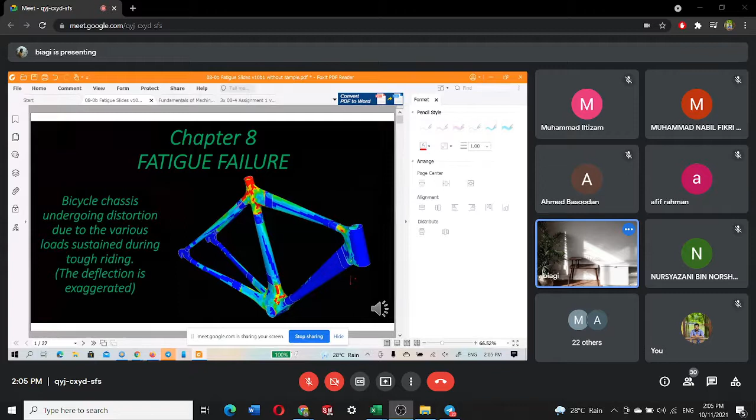A single force, it means that, wait, maybe I should open this one. Can you all see me or not? Can you all see me? Yes, can, Betul.

Okay, so we're talking about this cable. This cable is actually quite thick, about 2 millimeters. If it's steel wire, and I ask you to break it just like this, using a single force, a static force, if you apply it like this, it will be static force. Regardless of how strong you are, you will not succeed in breaking that wire or cable, whatever you want to call it. It is so strong that there is no way a human being can break it. It is non-logical.

Unless of course you are somebody very, very strong, not a normal human being. If you're a normal human being like me, there's no way you can use static force to break a 2 millimeter steel wire. You cannot either pull it or twist it, whatever, you cannot break it. Why? Because the steel is so strong. Let me remind you that steel is about 7 times stronger than bone, and your bone is many, many times stronger than your flesh. So what are the chances of you breaking the steel wire?

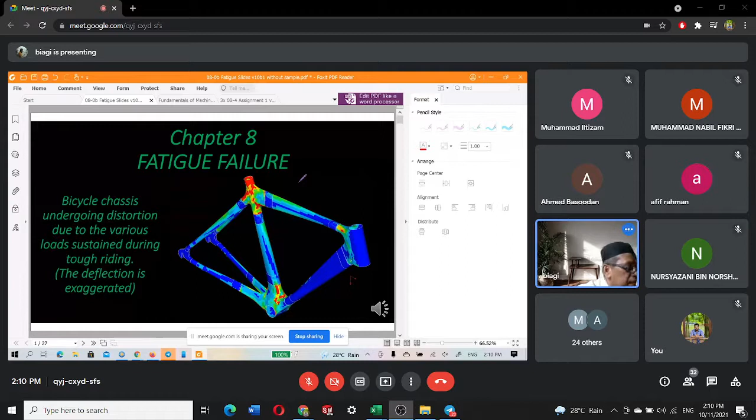Okay, so let's go back to this lecture. Bicycle chassis, of course, has been designed to be so strong it will not fail due to fatigue failure, to fatigue stress, because why? We do the calculation. Who does the calculation? Engineers like you all. You do the calculation and make sure it won't fail. That is why you are learning this.

There's some more. There are a lot of fatigue stresses in this shaft, on this shaft, in this shaft. Of course, there's also a lot here. Why? Because the force is repeating. So because of that, there are a lot of stresses here, fatigue stresses.

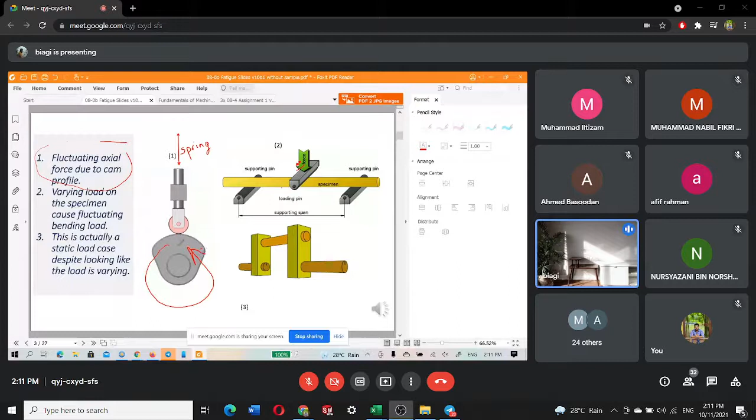Take a look at this one. What you see here is a fluctuating axial force due to cam profile. I think you're familiar with this. When this thing rotates, it will push up and down, and because there's a spring, it will go down and then move up again. What happened here is that there will be a repeating axial stress acting on this shaft.

Now what about this one? This one is also the same like the first one, but the stress is due to bending, which is more dangerous, I'd say. When stress is reversing, it is evil in design. So this is bending - it will bend like this, become straight again, then bend again and straight again. This force creates bending stress, and the bending stress is repeating. Similar for this one, there will also be bending stress.

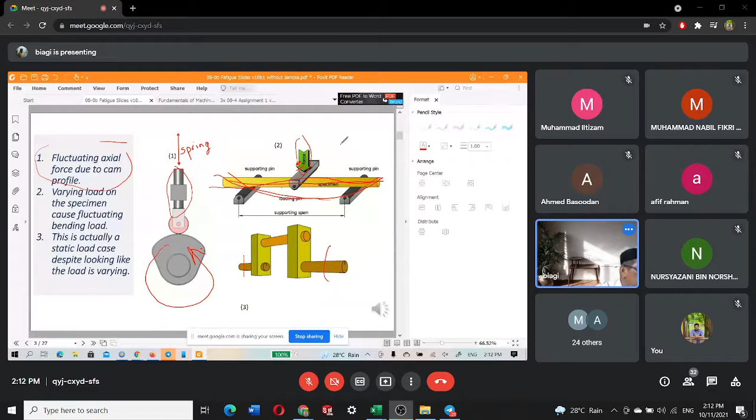So when it is repeating, then you are talking about fatigue, and when there is fatigue, you have to be very careful. This is a failure due to fatigue. Most people design and calculate everything nicely, but sometimes there are still unknown forces that can create fatigue stress and cause this to fail. Similarly, this is the result of fatigue stress.

So let's go to our topic today: chapter objective is to analyze fatigue load and stresses acting on critical structure, and to evaluate the safety of the structure using various fatigue failure criterions. The outline will be fundamentals and fatigue strength, then fatigue load and stresses, stress concentration, and then fatigue failure.

Now the first one will be fatigue fundamental and fatigue strength. We are going to look at how to determine the strength of the steel with regard to fatigue - in other words, fatigue strength. You know that we have SUT, the ultimate tensile strength, and SY, yield strength. These are all static, for static stress and static load that you have studied in the previous topic. But right now you are doing fatigue stress, so you must find the fatigue strength.

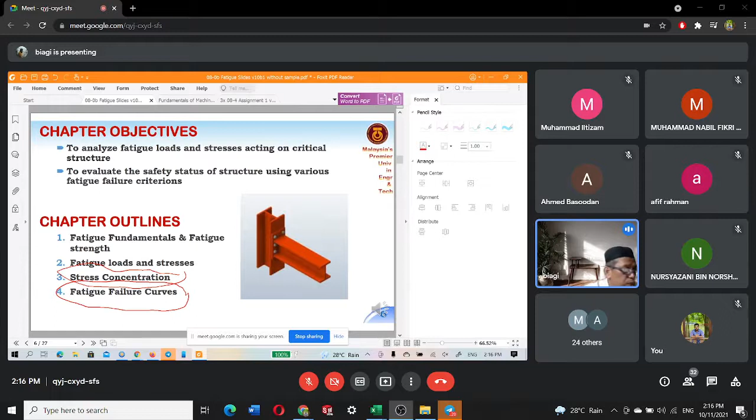So let's go to the next topic - how did this one start? So many scientists have tried to study fatigue failure, and many did good work, but the one that is most popular and most referred to would be this man, R.R. Moore. He created this experiment to determine the fatigue strength of material.

Let me introduce to you this machine. Now what you have here - this is a bearing. And then you have a motor here.

And then here you have a counter. You know what is a counter? It counts the number of revolutions.

And then you have this one, this is the load, he will apply load F. Why? Because this is the specimen. So what happens is that he is going to conduct an experiment creating bending stress here. There will be bending stress here, and because of that bending stress, this specimen structure will fail, will break.

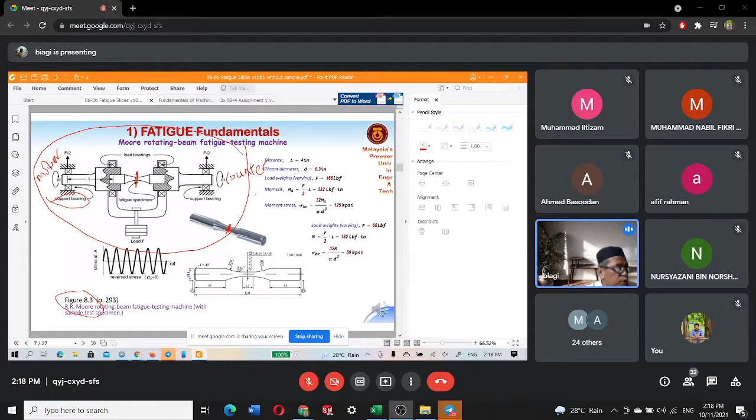Of course he creates thousands of this one, not one, thousands of this one. And the rule is that according to his experiment, all these specimens are totally identical. Everything, the smoothness, it is very smooth.

And the shape, everything are all exactly the same. So what he did is that he will place it inside here like this, you see, it placed inside here like this. And then he will apply the load F.

Now the question is, of course, some of you may ask, why don't just put this thing here? Why you need this thing? So complicated, right? Why just don't put this part here up to here? Anyone can guess what is the answer? Why does he have to create such a very complicated structure, this one?

To determine the bending stress. Remember I mentioned that when there is a bending stress, there is also another stress. What is it? Transverse shear stress. So if he were to put this one just like this, then other than bending stress, there will also be transverse shear stress. So what he will get will be a value that has to be calculated more complicated. So by doing this structure, the bending stress will be pure bending stress. There is no transverse shear stress, and so the experiment is very, very accurate.

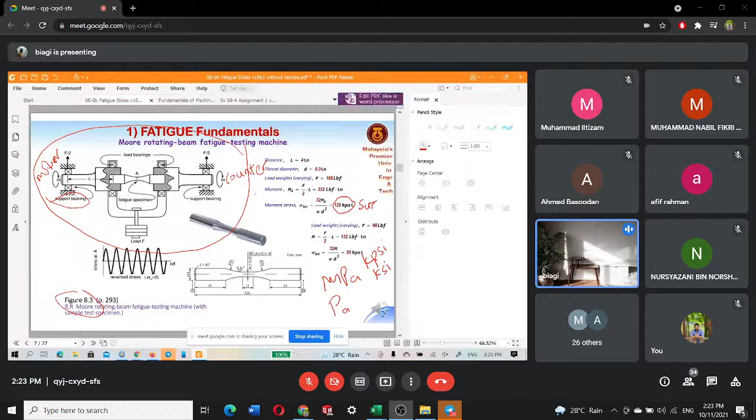So for that to happen, the force here has to be 166. Force is 166. So by applying a force, pound force of 166, then we have this one. So when we apply the first one, 166.

So after placing the load 166, the motor was started. They switch on the motor, the motor starts to rotate. When the motor rotates, the shaft also rotates. This shaft also rotates. And the counter calculates the number of cycles, one cycle, two cycles. So when F is 166, before the first cycle is completed, this one breaks.

Okay, so here we write 166, zero cycle.

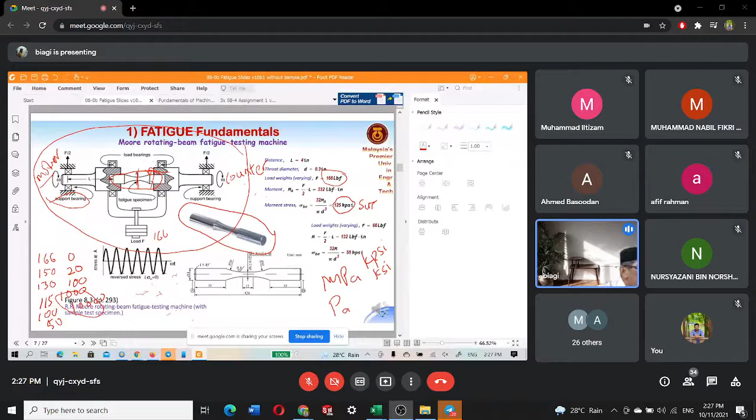So he tries lower, also the same. Try 40, also the same. Lasts forever. It does not break.

So with this data, what Moore did was create a graph. He created this graph based on the data from the experiment that he got, and as you can see, it creates...

a special line. You see this one, and then you see this, and one more here, and here you see this one. So this is the one from SUT.

When the load is reduced some more, it lasts even more. When F is reduced some more, you get this one. And then eventually at 50, remember at F equal to 50, it comes to this one.

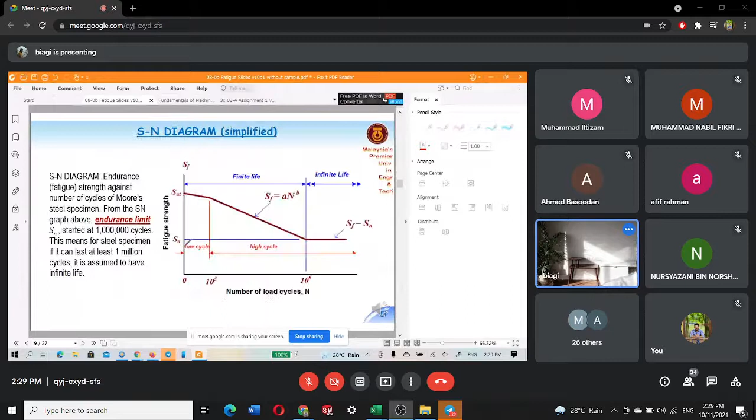Because different books, I forgot, different books use different terms. Wait, this is the endurance limit. So this one, 50, is the endurance limit.

It is the, okay, this is the, wait, this is the right, endurance limit. So this 50 is the endurance limit of this steel.

So what is the endurance limit? Endurance limit means that if you were to apply a stress lower than the endurance limit of the material, then that material will never fail. It will continue and continue and continue forever. And this is a very significant finding.

Why? Because if you look at here, if you look at this one, at 10 power 6 cycle, right? Now, if you say for 10 power 6, so if you apply a load at here, will it fail? Can it fail? Yes, it can fail. But anything from here to here, okay, let me clear that one first.

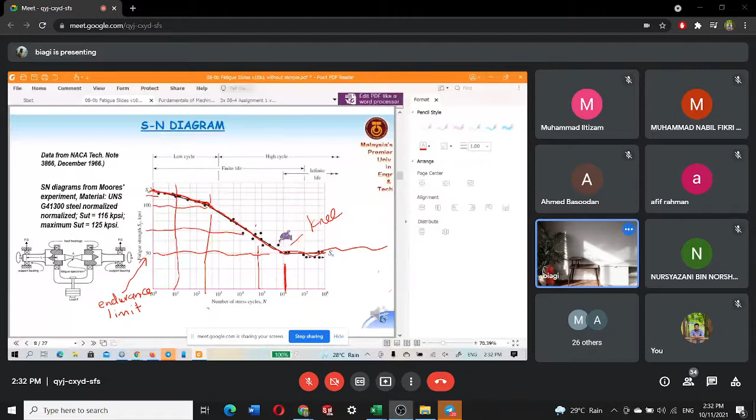Can I use this one? Good, I'm using Foxit. Okay, so everything from here to here can fail. So if you apply the load from here to here, the structure can fail.

So if you want the structure to not fail, then you must apply the load that is 50 or lower. Now, if you look from this one, you will notice that this one is 1 million cycle.

So the steel, after 1 million cycle, if you use anything higher than 50, let's say use 51 kpsi, then it will not be 1 million cycle. It will be maybe 999,999. Still will fail.

Okay, so before I proceed further into this, I hope you're okay. Let me explain to you now. This one here is called low cycle, that is from 0 to 10 power 3.

So from 1, from 1... what is this?

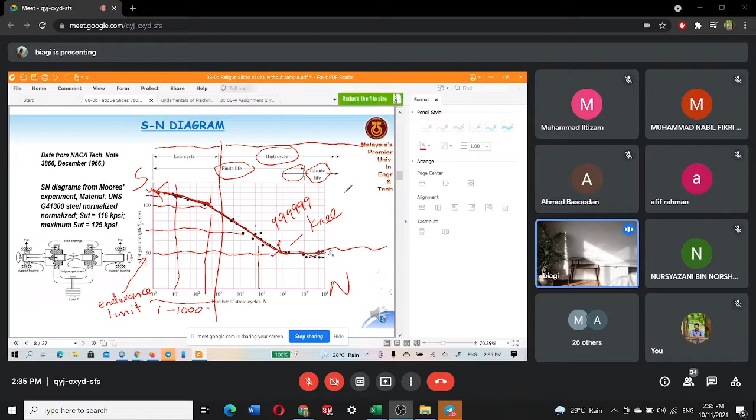However, you can see here there is an ambiguity, and this ambiguity is by the research. So for the sake of education, we have simplified this diagram to become like this. This will be the diagram that you will be using.

This is the endurance limit cycle, endurance fatigue strength against number of cycles for steel specimen - the SN diagram, endurance limit, SN, is endurance limit. It starts at 1 million cycle.

This means that for a steel specimen, if it can last 1 million cycle, we know it can last forever. So if you're doing your experiment and discover it can last 1 million cycle, you do not have to test for 2 million, 3 million, 4 million, or 5 million. No need to test anymore. Once it reaches 1 million, it means it will last forever.

Of course, there are external factors that can still make it fail - corrosion and other things. Assuming there's no corrosion, everything is fine. Once you've discovered the specimen can last 1 million cycle, it means it will last 2 million cycle, 10 million cycle, even a googol cycle. A googol cycle, you know, right? A googol cycle is a value with 100 zeros - like 1000 has 3 zeros, googol has 100 zeros.

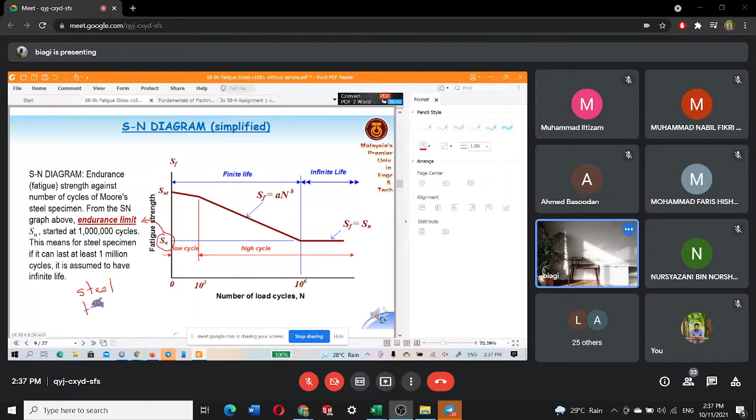The fatigue strength, or we call it the endurance limit, only exists for steel and titanium. Aluminium does not have an endurance limit. What happens when you use aluminium? It will continue to go down.

So those of you who want to create something that lasts forever cannot use aluminium. That's why in the Grand Prix, they use aluminium - because after the race, they throw away the old engine and replace it with a new one. Can your car afford to do that? Today you drive your car, then after you go home, change the engine? That would be a miracle for you all.

So for aluminium, it will continue to go down. The only materials that have an endurance limit are steel and titanium. Take note, remember, this is very important. So far, any questions?

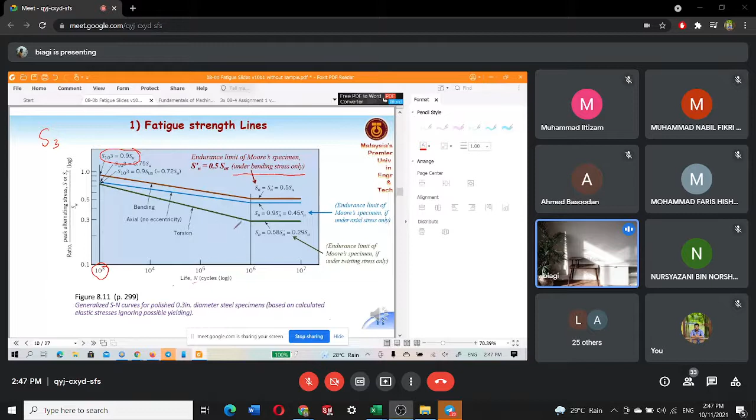This is the equation that you are going to use to determine the strength of the material. Here you have Sn is equal to S dash N times Cl, Cg, Cs, Ct, Cr.

So like I said just now, your specimen is not the same as the one by Moore. Your temperature is not the same as the temperature of that Moore specimen.

For example, maybe you're creating a shaft for your motorcycle, for your crankshaft. You know that your crankshaft will be very warm, in fact very hot, the temperature will probably reach around 80 to 90 degrees. Because of that, the fatigue strength will be lower, so that one will fall under Ct, the temperature constant. We call it the fatigue strength factor for temperature, Ct. So if the temperature is warmer, then you have to find Ct. It's just a matter of reference.

Take a look at here, you have Cl, the load factor. So first you have bending, you have axial, you have torsion. According to your experiment, is the load bending, axial, or torsion?

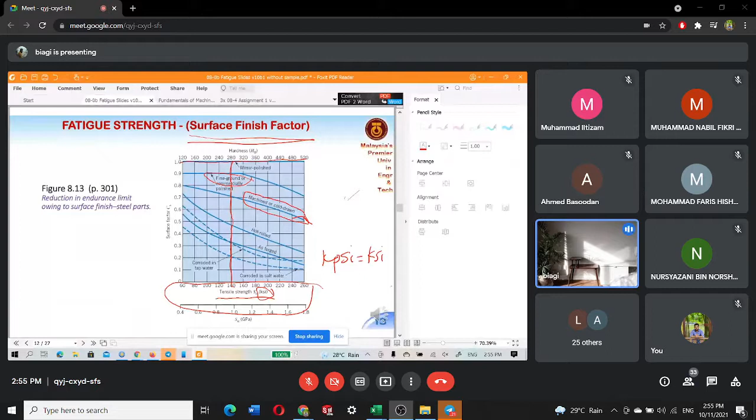Only special people, so if project, then you will use this one, fine ground. This one is only for special project. For most of the time in your experiment, it will be machined or cold drawn. What about hot roll? Now hot roll means that, this is what I say.

When you buy this shaft, you find the shaft material. Remember I mentioned you can buy the shaft, it can be a nail, or what I can't remember. A nail, that's right. So basically, all these are hot roll.

They are hot roll. Why? Because they are melted and then rolled out of the fabrication machine. Hot roll means it is produced by hot rolling. So of course hot roll has anneal and the other two I can't remember. The thing becomes hot, and when it's hot and soft, they pull it out, or they squeeze it out of the hole.

Now cold drawn means it is quite cold, so it was forced through, a lot of pressure is required, and because it's quite cold, the expansion or compression is very small. Because the compression is small, that's why the surface is quite smooth, comparable to machined surface.

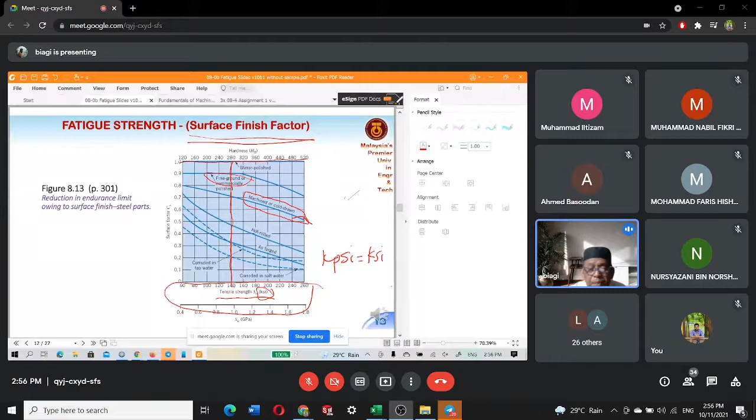Whereas for hot roll, because it's hot, by the time it cools down the surface becomes quite rough. Then worse than hot roll will be forging or casting. You have this one, forging or casting - it is cast or forged, then you take that one.

And corroded in tap water, that one is beyond our scope. So this is diagram 8.13 that you must be familiar with, this is to get the surface factor CS.

Now CT: if the temperature is less than 840 degrees Fahrenheit - how many is that? 840 degrees Fahrenheit is equivalent to 448, okay, Celsius. It's 448 or 450. 450 Celsius. So anything less than 450 centigrade, then bending will be 1.0, axial 1.0, torsion 1.0.

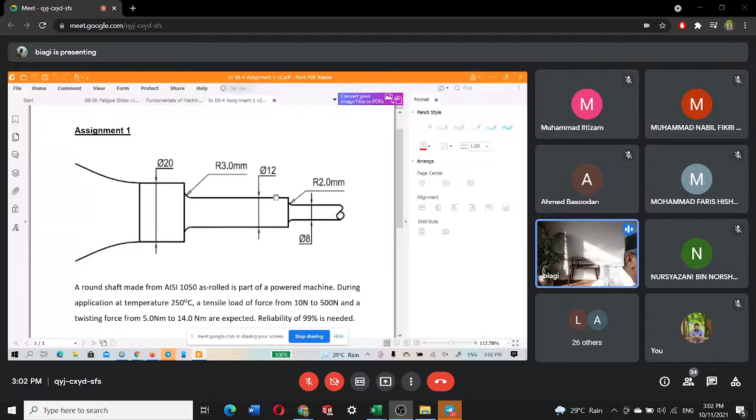Okay, I want to give you 15 minutes to find out what will be the Sn, the endurance limit of this. Now what is this? This is a round shaft made of AISI 1050 as-rolled steel, part of a powered machine. During application at temperature 250 degrees centigrade, a tensile load of force from 10 Newton to 500 Newton...

...and a twisting force of 5 Newton meter to 14 are expected. Reliability of 99% is needed. So what happened, this is a powered machine, to twist and press a screw, not a nail. You use it to twist the screw, and when you twist the screw you must also force it axially, you press it inside. So that's why there are two forces here. This is basically a screwdriver, something like a screwdriver.

So a tensile load force of 10 to 500 Newton, the load is varying from 10 to 500 Newton, but that value is not important to you. What you need to know is that it is a tensile load, and tensile load is axial. So one of the loads here is axial. The second one is a twisting force, that's a torque here, 5 to 14 Newton meter. So there are two forces here: you have the tensile or axial stress, and you have also the twisting stress, that is the torque.

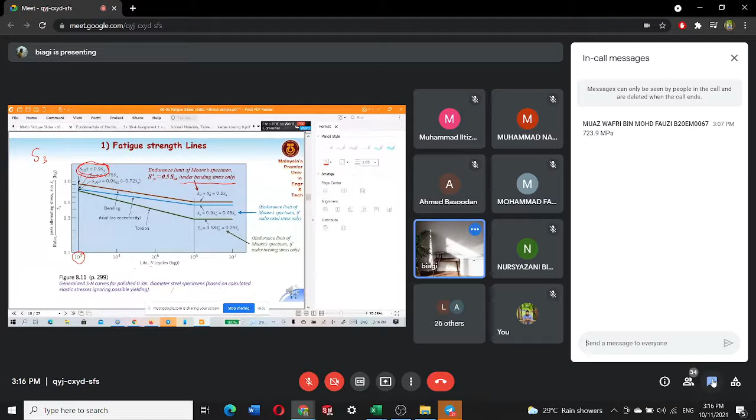And then what about S3? S3 is equal to... wait. S3 is equal to 0.9 SUT, this one, which is for bending. Why do we use the one for bending? Because it is a complex load, there are complex stresses, there are two stresses, so that's why we use the brown line. So S3 equal to 0.9 SUT. Any problem? Anyone has any questions?

So S3 equal to 0.9 SUT, so it will be equal to 652 roughly, MPa. All right.

Okay, so what is this? This is Moore specimen.

So what you need to do is find your specimen. Sn is equal to Sn dash times... look into this one. You have here Sn, CL, CG, CS, CT, CR. You remember? CL, CG, CL, CG, CS, CT, CR.

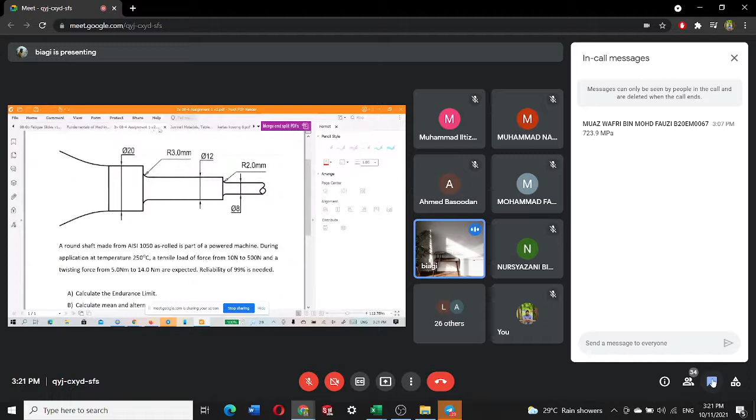Okay, CG, what's the value of CG? Do we take 0.8 or we take 1.0? If you look at the question again, the part that is most critical with this one...

Comment: the part that is critical will be this one, or here. Based on our judgment, we know that this one is going to break first. This one is stronger, this one is larger, right? This part is larger, it's stronger, so it will break here first. So we are using diameter 8.

So if we were to look at the fatigue slide here, we have to use 1.0. Remember, cannot use this one, because why? This is a complex case, cannot use this one because it's a complex case. And because it is 8 millimeter, so we use the one at the top, we cannot use this one. So that is 1.0. So that's the value of CL.

So this is 1.0 times... okay, CL CGCS. Okay, no? CL CGCS, okay CGS, correct. And then surface factor, look at 8.13.

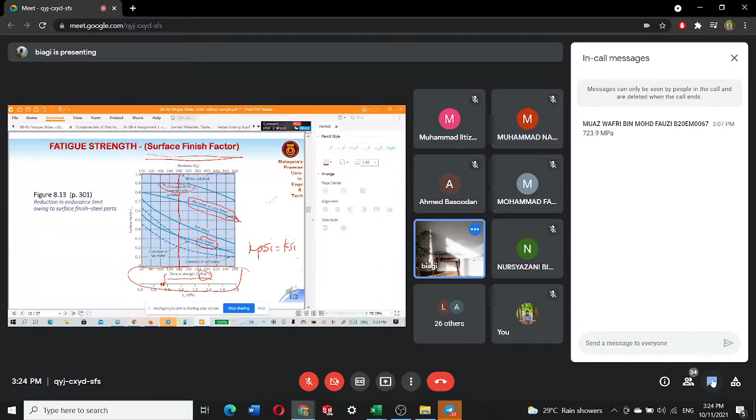0.7, okay, so 0.724 here will be here. Correct? 0.24. So if we were to go up, from here I were to go up, okay, machine, so you will have this one. Does it move just now? Okay, it moves.

Okay, 0.724, so it should be, because this is a machine, so it will be here. So 0.7, 0.75 around there, 0.75, 0.74. Okay, so this one is... why is it so difficult? Answer 0.

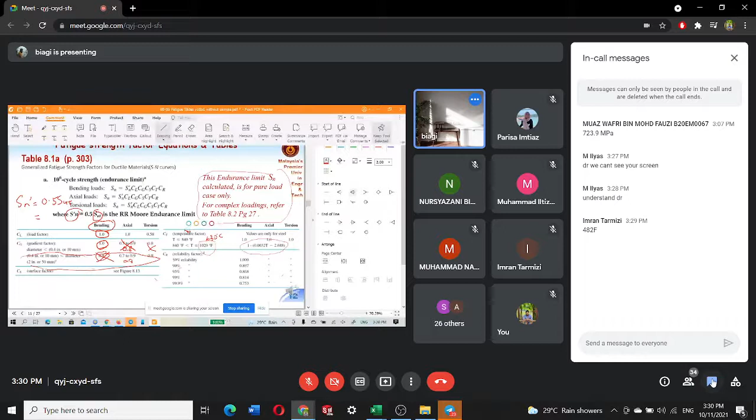448, so less than 448. So you agree, right? CT is equal to 1 because this is 448 degrees centigrade. Okay, so since temperature is 250 degrees, we can calculate that this one is 1, 1, 0.74, CT times 1, and then times CR. CR is equal to... 99, what's the what? 99 degrees reliability, yeah? 99 degrees reliability. So here you have 99% reliability is 0.814.

So you get 0.814. What is this? Yes, okay. 0. What is going on?

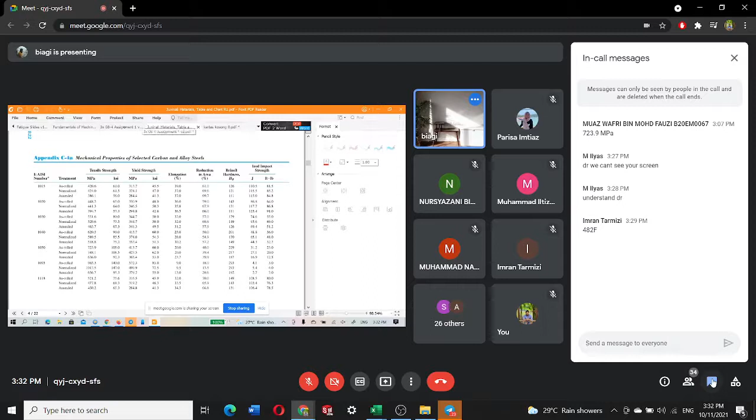What is this? Hold on, I don't understand what is going on. Let me try eraser first. Okay, let's try comment, cancel. Okay, yeah. But battery habis. I do not know what's going on. Okay, I do not know why that one doesn't want to write. Oh no.

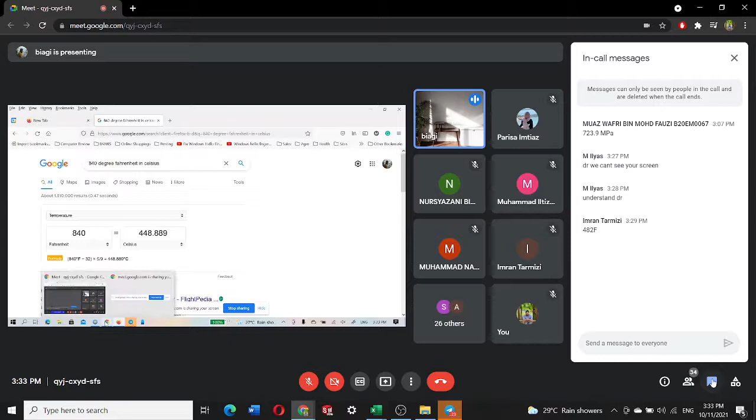Zero point. Is there something I don't know? Don't tell me my computer hang or no. Hold on. Oh, the software hang. Okay, the software hang. Okay man, okay okay, so I will use this one. Yes.

Okay, it's back, 0.74 time, time, 0.814, correct. 0.814. So I calculated this one to be around 224 megapascal. Okay, so what is this?

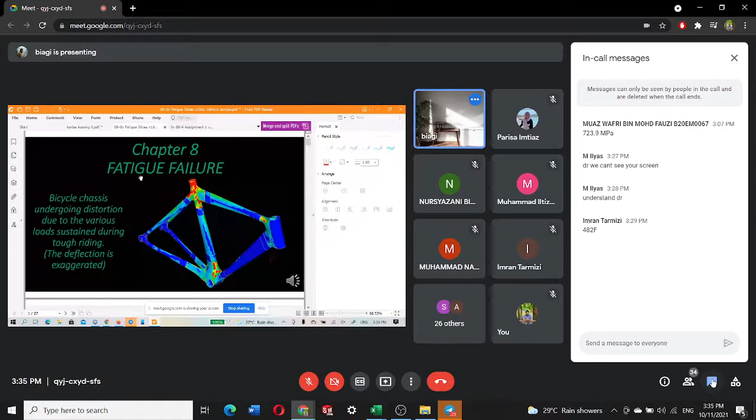So what we have here is the SN diagram. Once you have this, you have discovered or determined the fatigue strength of the machine. So later what you can do is draw the SN diagram, based on what you studied before. So it will be, take this one. Based on the brown line, SN here will be equal to this one.

So S3 will be 0.9 SU, right? S3 0.9 is 652. So this S3 here will be 652. And then your 1000 here will be this one. This is 1000, this is 10 to the power 6. Okay, so this is your SN, 224.

And so this is the line that you are required to draw. This will be your SN diagram that you are going to use later after you've done the stress calculation. Okay, any questions? So it's not so difficult.

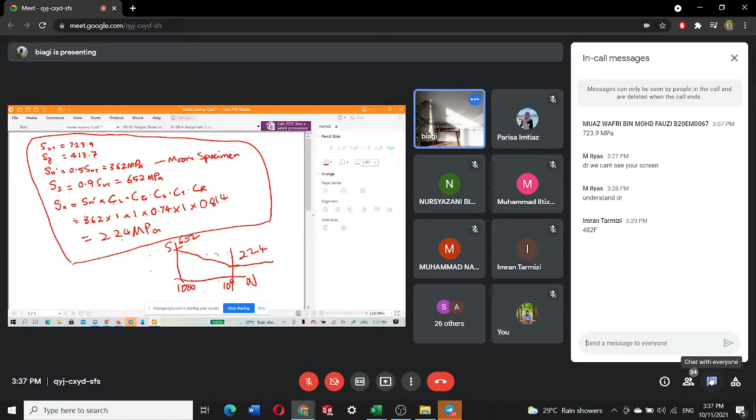Okay, any question? So basically you get 1/4 of the marks already. Remember, if you get this one wrong, everything's gone. Okay. This one is not difficult. Most students should have no problem getting this one right.

Okay, so I assume that you have no problem with this one. So can we proceed with our lecture some more? Any problem so far? Okay. You all are quiet, make me nervous. Are you still there?

Okay, so if you have no problem, we'll go back to our slide here. So this is the first part. Okay, first part, finding SN. Finding SN is the first part. What is SN? The endurance limit. Basically, we're saying that it's the fatigue strength of that material.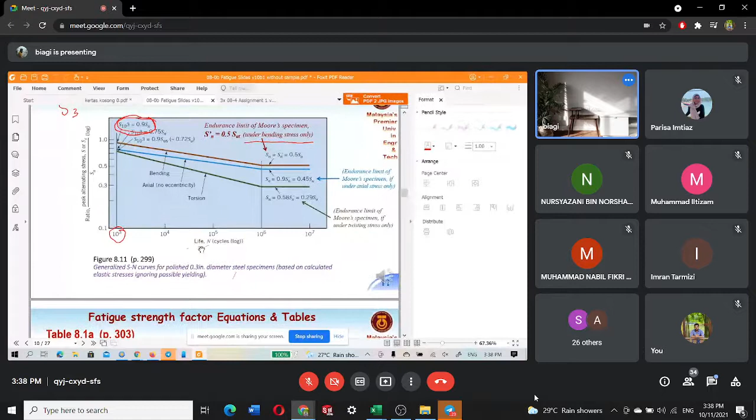Okay, after you have done that, you have calculated everything. So now you have to start on fatigue stresses. Now, fatigue stresses is like this. When the load is repeating, like this, that's repeated stress.

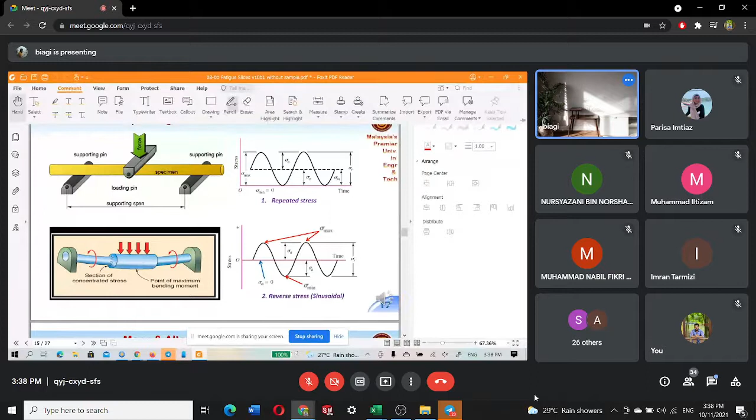Okay, repeated stress, then it becomes fatigue stress. Now, repeated stress in this case, the term repeated stress in this subject means that the load, you can see this one, here is 0, okay, here is 0 stress, okay, here is 0 stress.

So you have here pressure, when this one is put down, so this one will bend, so there will be a stress here, the stress will go up to here, and then it will be released, it will be straight, and then the stress will go here, and what here? No stress, 0 stress, and then it will continue again, and then it will go up again here, full stress, and then it will be 0 again.

This is called repeated stress. So it is apply, let go, apply, let go, apply, let go. This is repeated stress. Okay, now there is another one, repeated stress, but in this subject the term used is reverse stress. What is reverse stress?

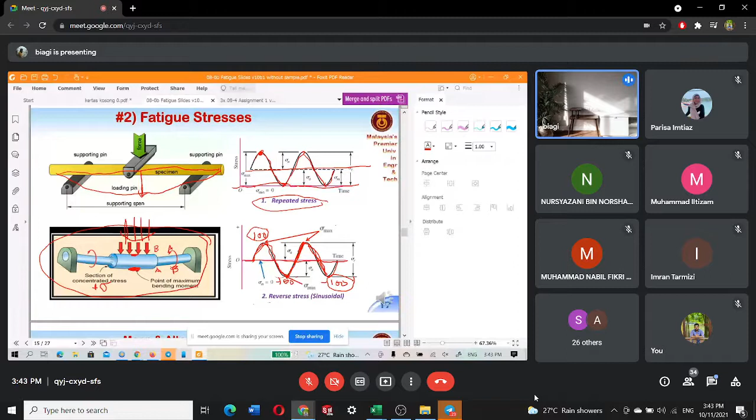So when the value here is 100, and the value here is also 100, the value must be the same, then it is called reverse stress. Most machines actually suffer this kind of stress, like pistons - they support this kind of loading. Most specimens have loading like this, reverse stress, though this is very seldom. So you look at the machine, this is the one that is most used - the stress will be 100 maximum, then negative maximum, then positive maximum, negative.

So we come to the end. The mean stress here will be 0. Now the value between the mean stress and sigma max, this value will be sigma A. What is sigma A? Sigma A is called alternating stress. The line at the middle is called mean stress.

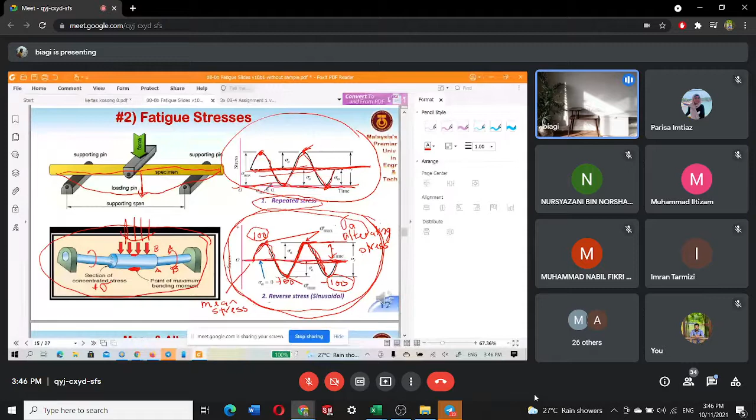Mean stress is always in between sigma max, which is this one, and sigma min here, somewhere here and here. So sigma min is this one. Based on this, you can calculate what will be the sigma min.

So finding the stress is about finding sigma m, which is mean stress, and finding alternating stress. This is mean stress, this one. As long as you find sigma m and sigma a, you have covered 2/3 of your work. But mind you, finding sigma m and sigma a is the most difficult for the student - many make mistakes here.

So now when you do your calculation, for fatigue to occur there must be increasing load and decreasing load, or you can say repeated load. There must be a repeated load. So here there will be a repeated load. This one is sigma max, this one is sigma min.

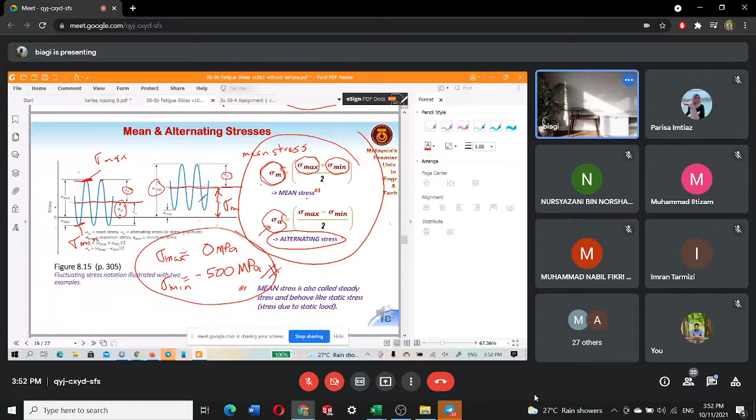Now, just now is to calculate sigma m and sigma a, sigma mean and sigma alternating. Now you are going to calculate stress concentration. For basic types of notches in stress concentration, there will be 3 of them. Actually in engineering there are a lot more, but for our subject here there is 3.

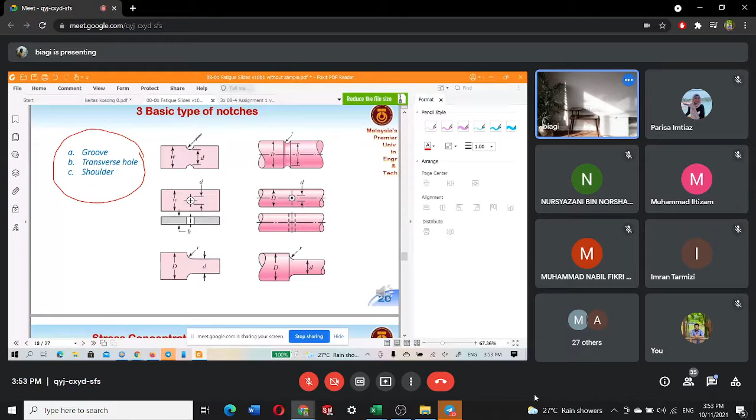Groove, this is groove. Transverse hole, this is transverse hole. And shoulder, this is shoulder, this shoulder, this is shoulder, and this is shoulder.

So when you need to determine your stress concentration, you must decide which one, whether it's groove, transverse hole, or shoulder. It's not so difficult, you have no problem deciding this one. After you have decided, you have to find the KF.

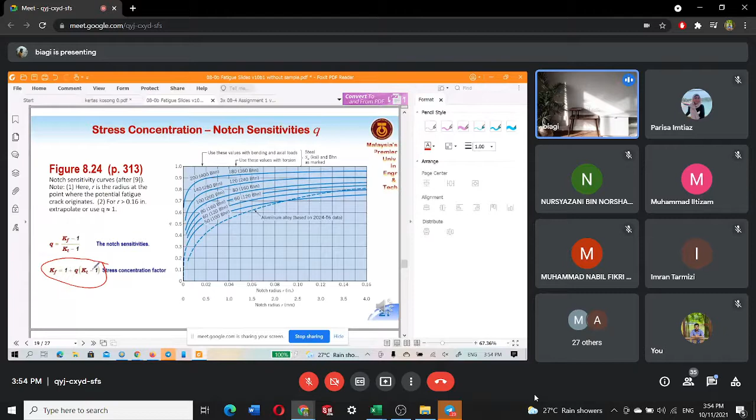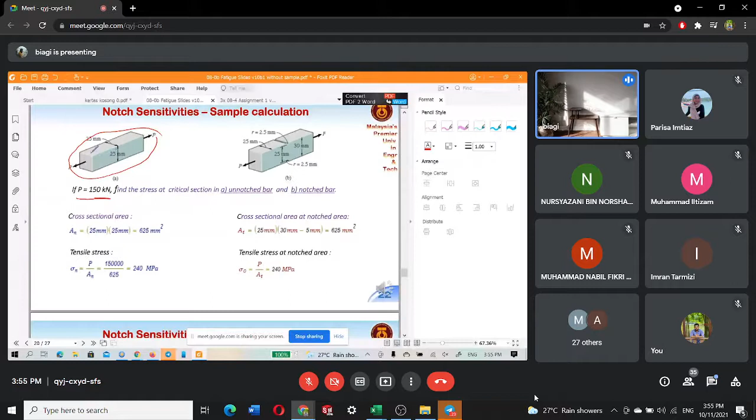Now in real life, groove can be scratches. If you scratch the surface of your specimen, that will be groove. So please take note, do not scratch your specimen, it's very important. Now the cross sectional area of this one is AN. Here is AN, AN 625. So the tensile stress here will be 240 megapascal.

Correct? This is no problem. Now, this one has a notch here. Okay, there's a notch here. The notch here is 2.5, right, as you can see.

So At here will be this one. Okay, as you know, failure will occur here, this part here, because it's the smallest part.

So At here is 25, which is 1 time 30 minus 5. 30 minus 5, 30 minus 2.5 plus 2.5. So the minus 5 here, the At is also 625. So you can see the area here is the same size.

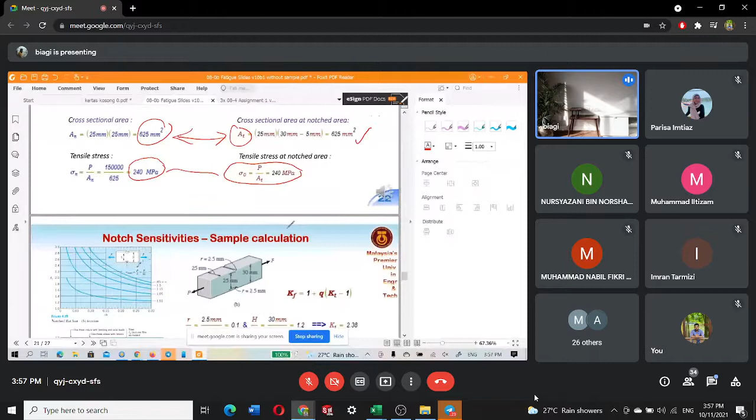So by right, sigma 0 here is equal to 240, also the same. Now sigma 0 here, I put sigma 0, means this is the value without stress concentration. So without stress concentration, the stress is also 240. Now after you consider that there is a groove here, so you must calculate the stress concentration. So what you have to do now is look into your table.

Look into your table. Where is my... oh yeah. Okay, you have to look for... this is figure 4.39. Look for it, you'll find this value here.

So now I'm going to open that part here. This one is easier.

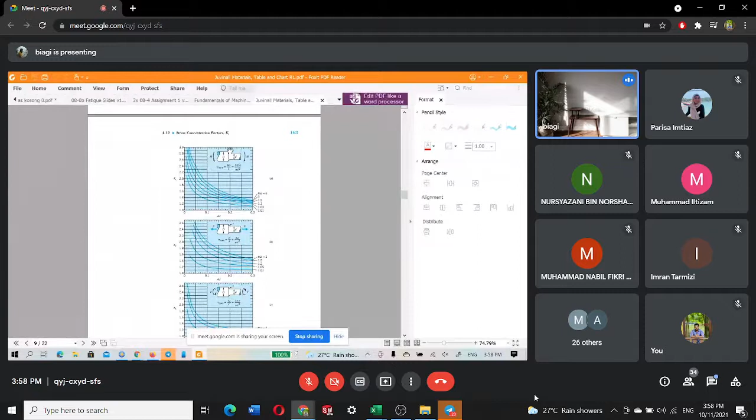So you have here many charts. So A, B, C, D, E, F, G. How many do you have? You have a lot of them. So what you have to do now is to determine which one will be same as your specimen.

Which one is the same as your specimen? You have this one, you have this one. This one is with transverse hole. This one with a notch. This one with shoulder. Understand? So this one is just nothing.

So take a look at this one. Based on our diagram just now, based on this one, it can look like this. So if you look into this table, this is not the one.

This is the one. Remember, you can see the groove here. You can see the groove here. So this one, there are two of them.

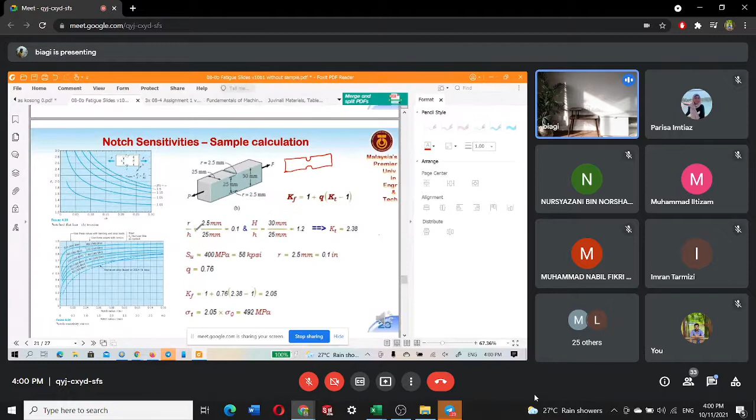Here you can see the value here. So there's the one. I'm going to make it larger. So you can see here, this one is R divided by H. What is R? This is R. What is H, small h? This is small h. So small h is this one.

So R divided by H is 2.5 divided by 25. You get 0.1. And then the next one you need will be H divided by h. It is h is this one. This is h, so this h is 30. Now h is again 25. So you have a value of H by h equal to 1.2.

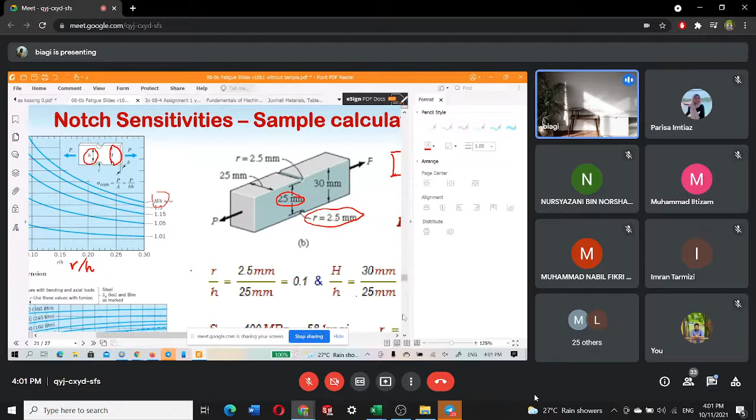So what you need to do now is to determine, now here, H divided by h is this one. So what's the value of this height? 1.2. So here you have R by h is 0.1.

Wait, there are two of them. There are two of them, right? Remember just now, there are two of them. One is for bending, one is for axial. If you take the one for bending, you'll fail.

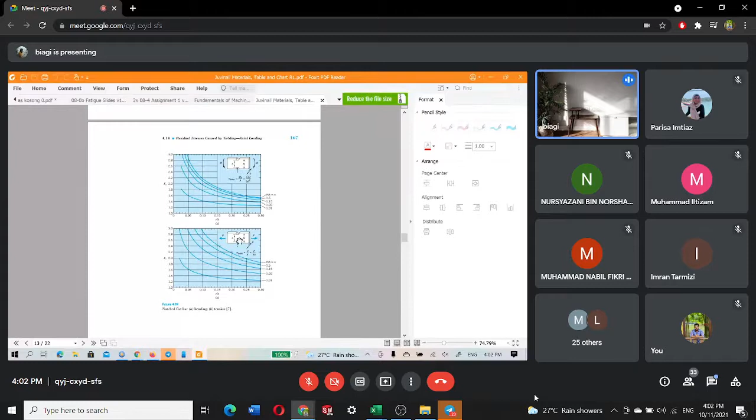Because the loading just now is axial, correct or not? The loading just now is axial. So you must take the one for axial. So take note, you have to select properly. This is for axial loading, this is for bending. So you cannot make mistake here.

So now you have this value. So R/H is 0.1, so you have to go up here. And then H divided by h is 1.2. Now this is 1.01, this is 1.05, this is 1.15. Can you see 1.2 here?

So 1.2 will be around here. Okay, this is 1.2. So what happened is bring it to the side here.

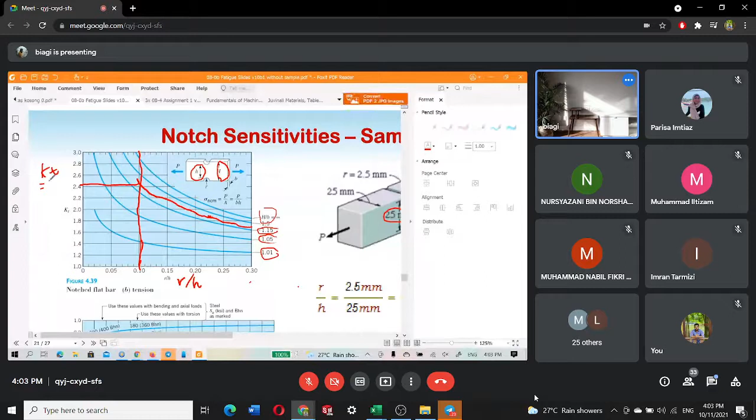So you get the value for this one, KT is equal to 2.42, based on my diagram. But here I've done the calculation already, so KT is 2.38. So KT is 2.38 based on here, because my curve is very ugly.

So you get KT. Remember, you must choose the correct chart. So now you get KT. Why do you need KT? Because you want to use this equation. You need KT.

Okay, you need Kt here. So you need to find Q. Now for Q, you look into this diagram, figure 8.24. Look into figure 8.24. You will see this one.

Okay, so you have here. SU is 400 megapascal. Now, as you can see here, this one is in kpsi. This one is 50 KSI or KPSI. This is 60 KPSI. This is BHN, Brinell hardness. So we are going to use the KSI.

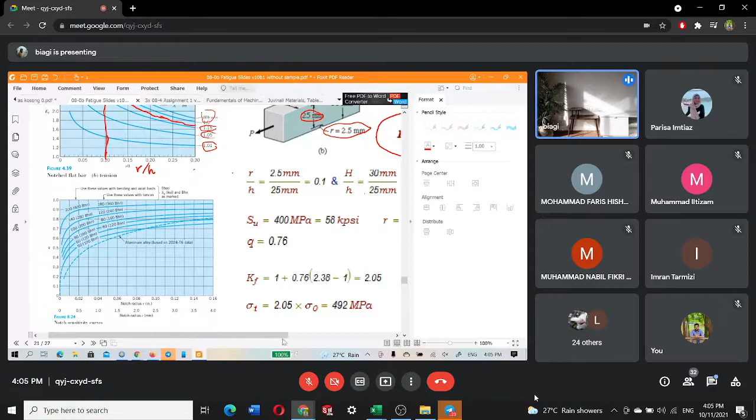The MPa is not given here, so what you have to do is convert MPa into KPSI. So you have KPSI is equal to 58 KPSI. SU 400, SU is 400 equal to 58 KPSI.

R equal to 2.5 is equal to 0.1 inch. So here you look at this. R is equal to... what? R equal to 1 inch. 1 inch. 0.1 inch. So R is equal to 0.1 inch here.

SU is equal to 58 kpsi. Now, you have two values here. Do not get confused. This one is for bending, remember, this one is for bending. This one is for torsion, this one is for torsion. Okay, this one is for bending or also axial.

So you must use this one, the one on the left. So based on this one, you said 58 kpsi. 58 kpsi is about 60, so it will be this one. Yeah, this one.

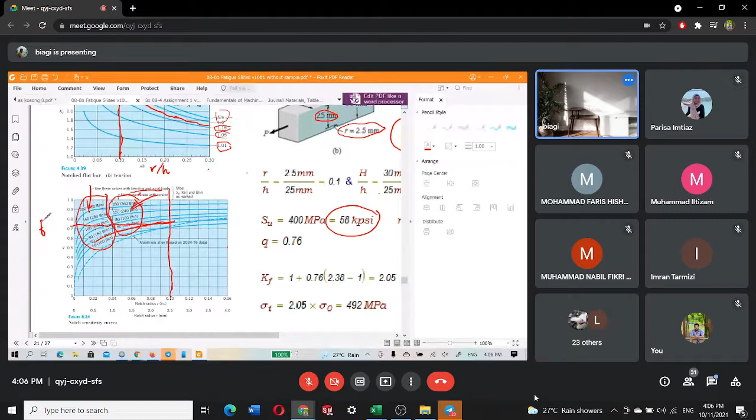Okay, so Q will be equal to here, 0.76. So Q is equal to 0.76. Okay, so once you get this value, you can put inside here. Put inside here, K, Q is 0.76. So you have Kf is equal to 2.05.

What is this? This is the stress concentration factor. Okay, and so what is the stress here? Actually, what is the actual stress here? The actual stress here is equal to this one: 2.05 times sigma 0 will be 492 MPa.

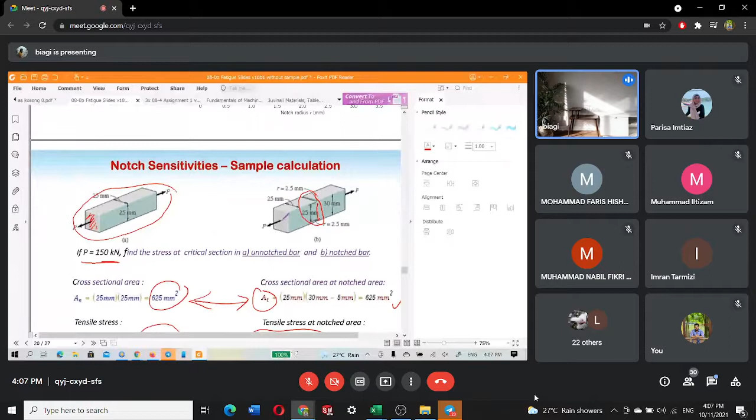So although the load is the same here, and the size here is also the same, this one is actually larger, right? But because of this notch, that makes it 25 also. So this one is actually 240. The load becomes 492. So the stress here, sigma T, is actually 492 MPa. Okay, so make your comparison.

Because of this small notch, the stress at this part here is actually 492. So just imagine, because of stress concentration, the value rises by more than two times. And then remember, because of fatigue strength reduction, the strength is also reduced. So the strength is reduced, the stress is doubled. Can you imagine what kind of failure you're talking about? This is going to be a very significant calculation.

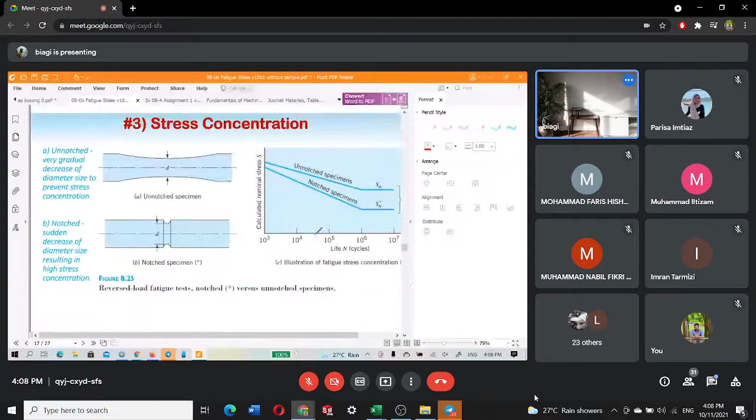So after you have determined this one, just now you have determined the stress. I've done our calculation. We have found what is the stress concentration factor, and we have calculated the actual stress. So now we have sigma T. Now you have sigma T.

So based on sigma T, now, remember, for fatigue there will be sigma max and there will be sigma min. So there are two values, and both must include Kf. You have calculated like just now. So you have sigma max, sigma min. That's why I put the word zero here. Zero here means not yet, not yet including Kf.

So sigma max, sigma mean, you must include Kf for both, then you get the actual sigma max. So I put here sigma max 0, sigma min 0. Zero means actually nominal, it's a term used by the book: nominal maximum stress, nominal minimum stress. After you include Kf, then it becomes the actual sigma max and the actual sigma min.

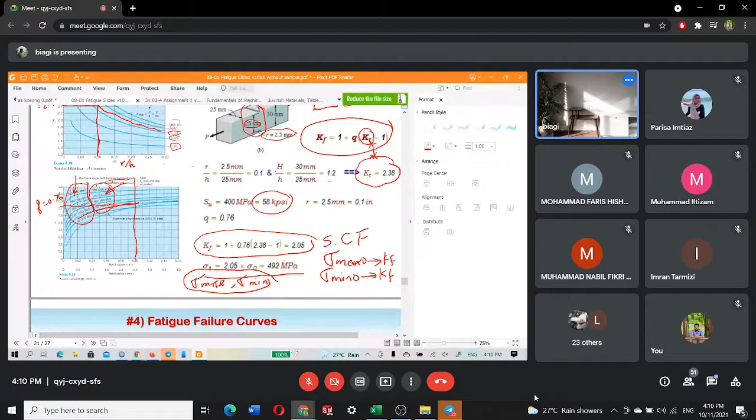Okay, after you get this sigma min and sigma max, what you do is use this equation, this one, to find sigma m, find sigma a. After you get sigma M, sigma A, you are ready to do the final part.

This is the final part. So there are two ways to do this. One is to draw the chart.

Okay, one is draw the chart. If you refer to the book Juvinall, they do not give you this equation. This equation is not given. Juvinall does not give this one. This one is taken from other books.

The reason I include that inside here is because if you have to draw the chart here, first of all, it takes so long time. Most probably you all take around 15 minutes. And then some more, because the chart is not accurately drawn, your accuracy will be very, very low. And because of that, it is useless.

So what happens is that I prefer you to use this equation. How do you use this equation? If I ask you to determine using Goodman line, all you have to do is use this equation. Find sigma A first, just now I've shown you. Find sigma M, I've shown you. You already calculated Sn, and you also know what SUT is. So what you do is find this one.

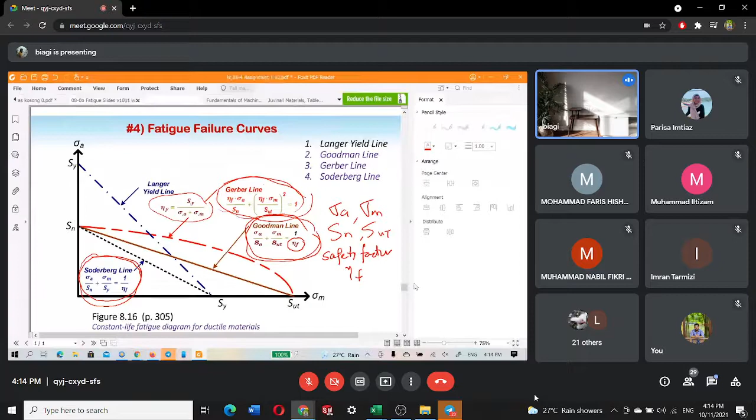Okay, understand? So what you have to do now is to finish up your assignment, homework, classwork. This one, yeah, I want you to do part B. Calculate mean and alternating. Find the sigma M.

Find the sigma M and sigma A. Take your piece of paper and start calculating.

So you are thinking what to do now, what to do now. Find sigma max, find sigma min.

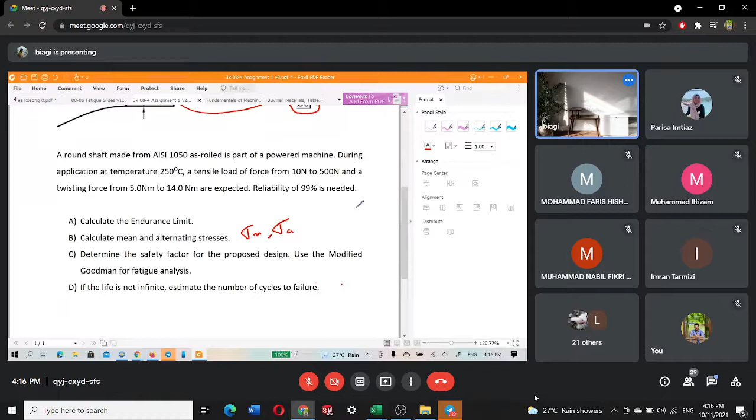Here you have actual 10 to 500. So what is the equation for stress, the equation for tensile load? Tensile load is equal, sigma AX is equal to 4F divided by pi d squared. Correct?

Correct. Right? Did somebody say something?

So what you do is, first of all, F is equal to 10. Find sigma AX. And then F is equal to 500. Find sigma AX again. So like I said, it's not so difficult. It's just that you have to do it 2 times.

After you determine sigma AX, you have to decide which one is min, which one is max. So one of them is sigma max, one is sigma min.

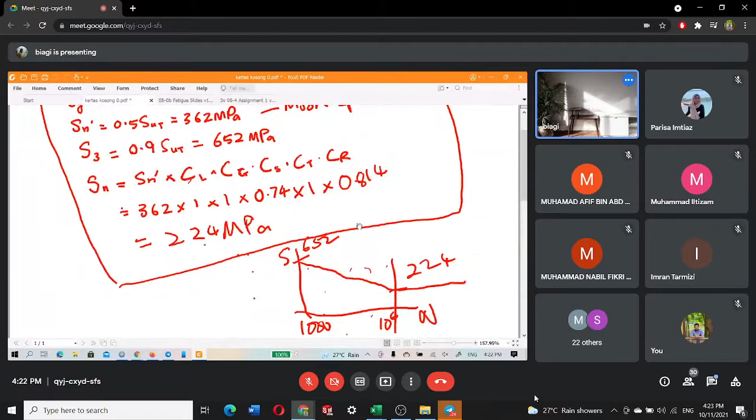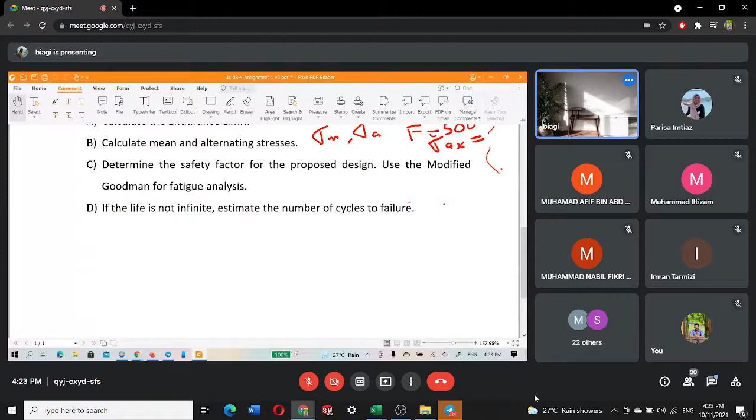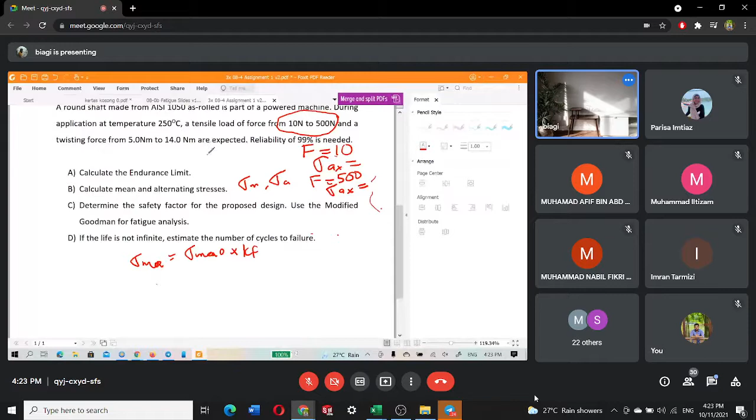Okay, so you have here sigma max. Sigma max is equal to sigma max zero times Kf. What is Kf? What is the value of Kf? The value of Kf just now we have calculated... never mind, I have that value. Kf is actually, just now if you have calculated, you know that Kf is equal to Kf for bending.

So difficult, this one. What is the solution? Okay, this is the solution. Always cannot disclose it.

Okay, so here obviously just now you have 500. You have F 500. This is 500 and this one is 10. It's very easy for you to come to a conclusion that F max is 500, F min is 10. It's not, okay.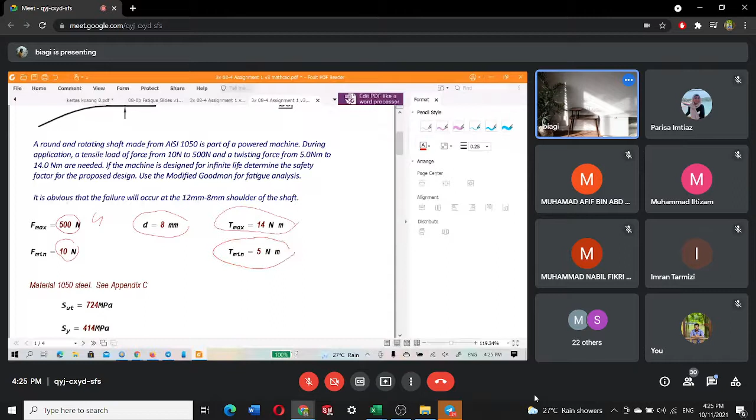D is equal to 8, correct? D is 8. Now T max is 14, it's so obvious. T min equal to 5 N m, okay. So based on this, material is 724, SY 414.

So endurance limit Sn is equal to 0.5 times SUT, 0.62, times 0.9. So you have Sn 223.948, basically 224. Okay, 224 megapascal.

Okay, so now to find Kt, to find Kf. Okay, so first of all... alright, why this one? Oh yes, okay, why this one? Okay let's try. So to find Kt, okay.

Okay, to find Kt, look for the diagram. Okay, this is the diagram, for the same one just now I show you. Okay, alignment.

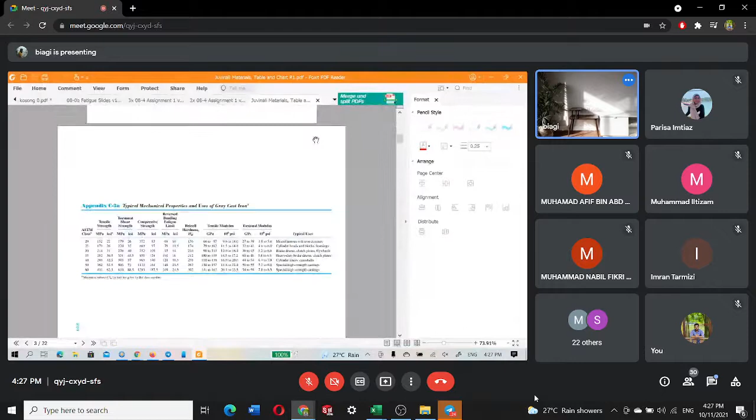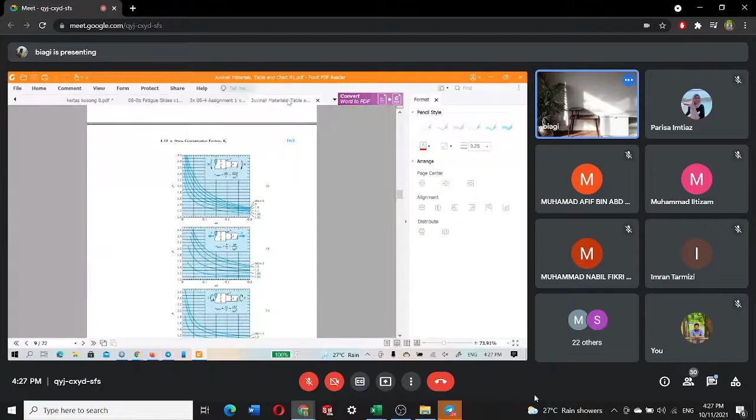So based on this one, the one that is so much the same will be, I think, this one. Okay, will be this one. Remember the 8, okay, there's 3 of them, so which one do you use? This one is bending, okay, there is no bending, so cannot use bending. We have axial, we have twisting, so use these two. So that's what happened, we are going to use those two.

Okay, axial and also twisting, so use this equation again. So you have d equal to 8, D equal to 12. What is D? D is the big one because this is the shoulder. For shoulder there always be a big one and the small one. Okay, so this is small d, this is big D. Big D is 12, small d is 8.

Now what is R? R is the fillet radius, fillet radius, so this is fillet radius 2. So what you need to do is find R divided by D. R divided by D is 0.25. And then you need one more, D divided by d. So D divided by d is 1.5.

So all you have to do is look into this 0.25 - this is 0.25, I already marked it here - and then DD is 1.5. So 1.5 is 1, so is here, right? So 1.5 is this line, go here, stretch. So you have 1.47, this is 1.47 here.

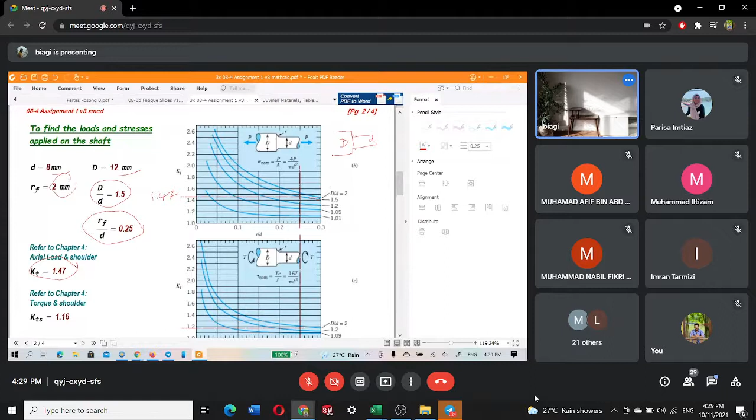And then look into this one now. Okay, we have this one that the value is the same, this one RD is still 0.25. Okay, and then DD is 1.5, so you will have to make some assumption here. Okay, try to do interpolation. What is mental interpolation? You get the value here, right, this one value here, okay, and then proceed, you get 1.16.

So for this one I put as KTS, for torque I use KTS. For axial or bending I normally use KT. If there are both axial and also bending, then I use KT1 and KT2. Okay, right now there is only one axial, so I use KT and I use KTS.

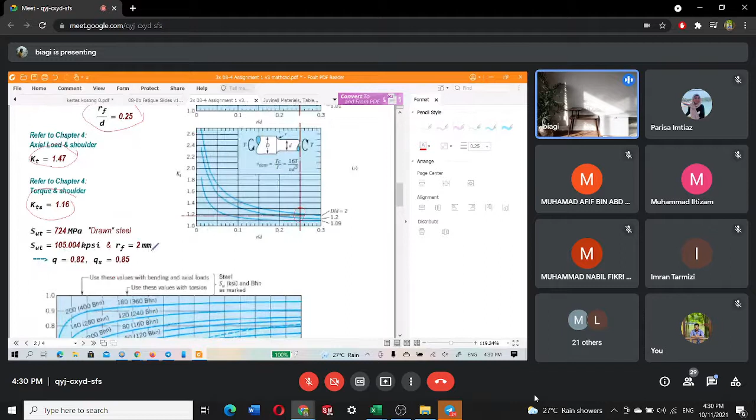Okay, so after that, after you have KTS, okay, find the SUT 724 drawn steel. Okay, for that value you can get Q. So here you have two values - remember I mentioned to you that you have two values here. This one is for bending and axial, this one is for torsion. Okay, so you have to use two of them.

Okay, so now you have the value as 724, which is 105 kpsi. 105, this one, and then R, where is R? Okay, R is equal to 2 millimeter. Where is R equal to 2 millimeter? Here, R is 2 millimeter.

So you have 105. Okay, this is 50, 60, 80, 100 - this is one. So 105 is slightly higher than this one, so it's somewhere a bit higher here. Okay, so here you go, 0.82. The next one is also 105, but 105 now is higher - 80, 120, 100 - so it should be around here.

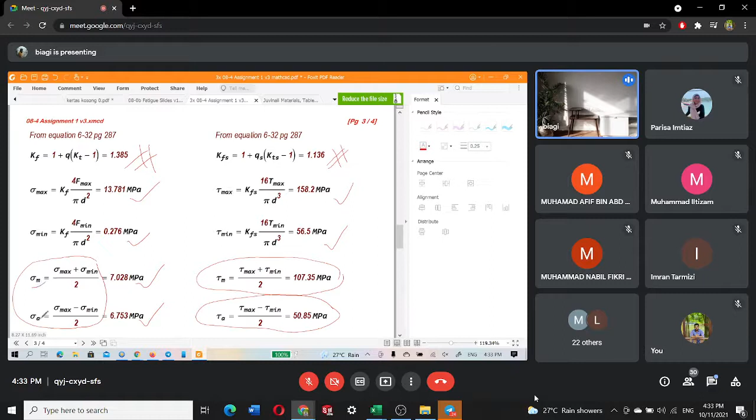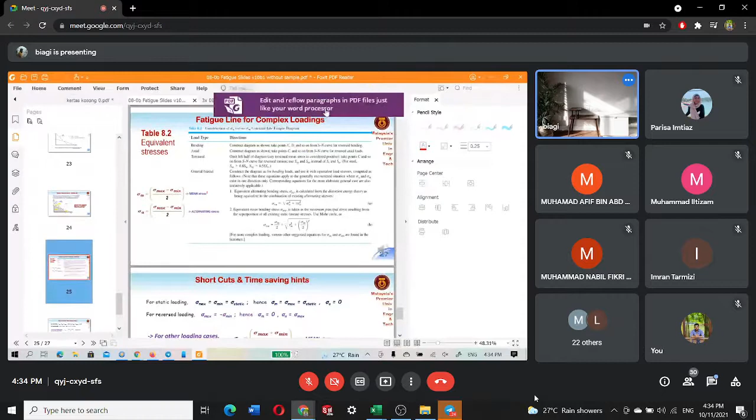So you get sigma M, sigma A, tau M, tau A. After you get tau M, tau A, now this equation, you can find it here. What page is this? Table 8.2. You can see here.

Just now you have already calculated sigma A, tau A. So how to combine them? You combine them, this is E for equivalent. So sigma E alternating, just now sigma A, tau A, so use this equation to find sigma EA. And then use this one, equivalent mean, use this equation to find equivalent mean.

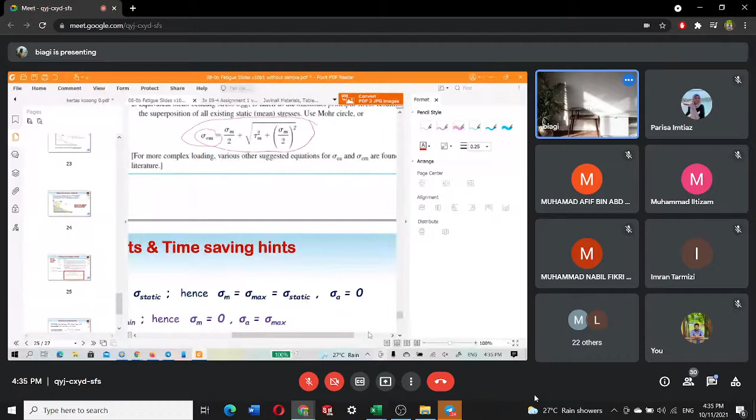So after you get this one, then apply them into this equation. After you have done that, apply them into the failure criterion. Where's the note? Static slide.

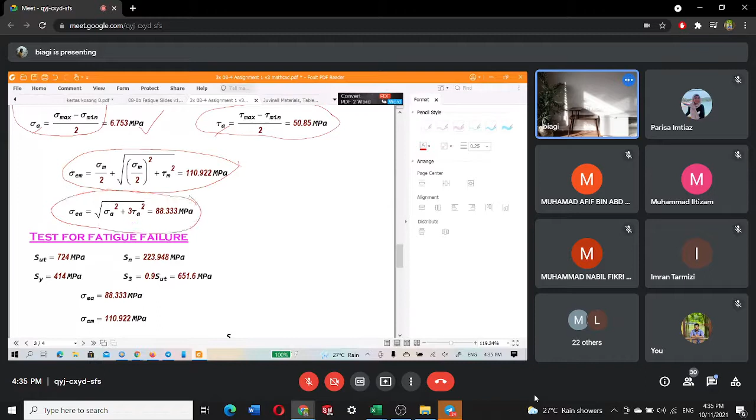So you get sigma EM, you get sigma EA, then test for fatigue. This is the equation. So you have SUT, SN already calculated, S3 calculated, so sigma EA is calculated. So Langer yield line is 2.078 and F is equal 1.826. Now let me explain what is Langer, because just now I didn't explain fully. But this slide.

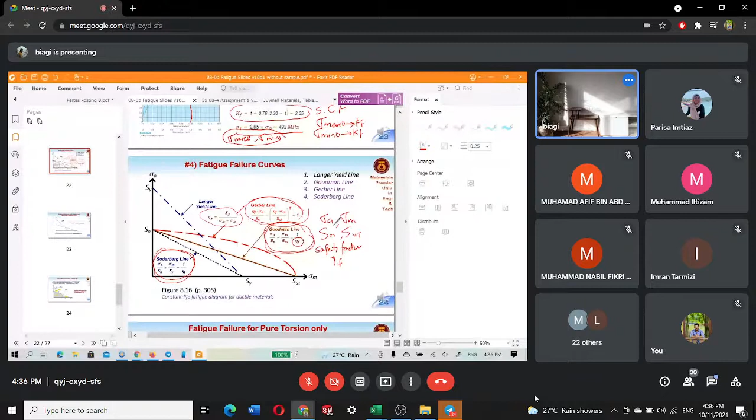Okay, so let me erase this one first. No simpler way.

Now, this is the fatigue failure criterion. Goodman is a fatigue failure criterion. Gerber is also a fatigue failure criterion. Soderberg is also a fatigue failure criterion, but this one is mostly used for those who do forging and casting. Gerber is quite popular now, but for our class we are going to use the Goodman line. This one is the fatigue failure criterion.

So what is Langer yield line? Langer yield line tests for first cycle failure. Remember when I showed you the Moore specimen, when the load is 166 pound force? The first cycle, the motor just started, the specimen broke. So the specimen broke at the first cycle. That is what Langer is all about. Langer is to determine whether the specimen will fail at the first cycle, it will test whether the specimen will fail at the first cycle.